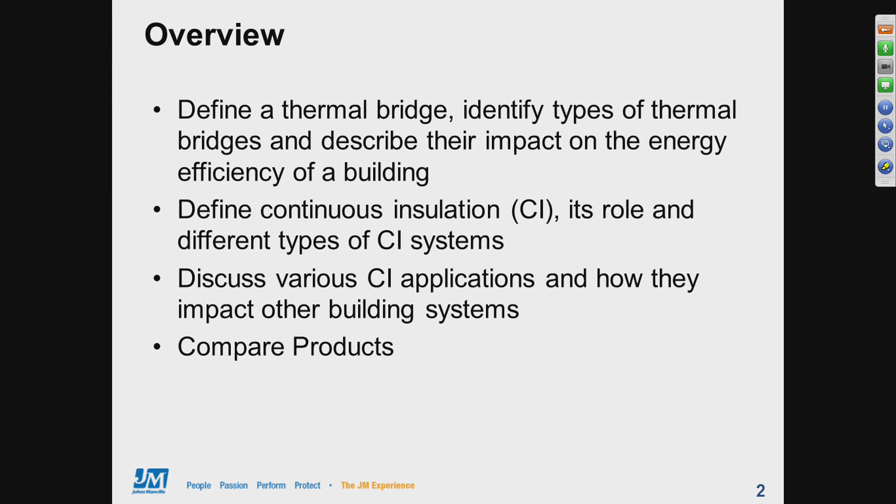Continuous insulation as a concept has been in use since the early 1900s, when ice houses were insulated on the interior with cork sheets. More recently, CI has seen widespread use on low-slope roofs since the 1940s. But today, our focus is going to be continuous insulation on exterior walls.

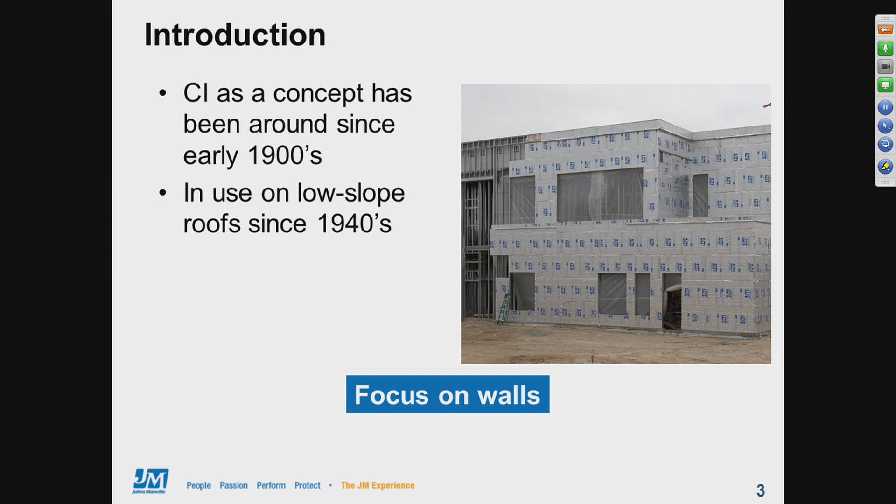Johns Manville currently offers two types of continuous insulation: foam plastic sheathing and exterior spray polyurethane foam. Polyiso is a closed cell foam which brings with it a very good R-value of about R6 per inch. Polyiso boards, in addition to being used as CI, can also create an air barrier and a water resistive barrier if the seams in the boards are taped and penetrations are sealed. Polyiso can be used above or below grade.

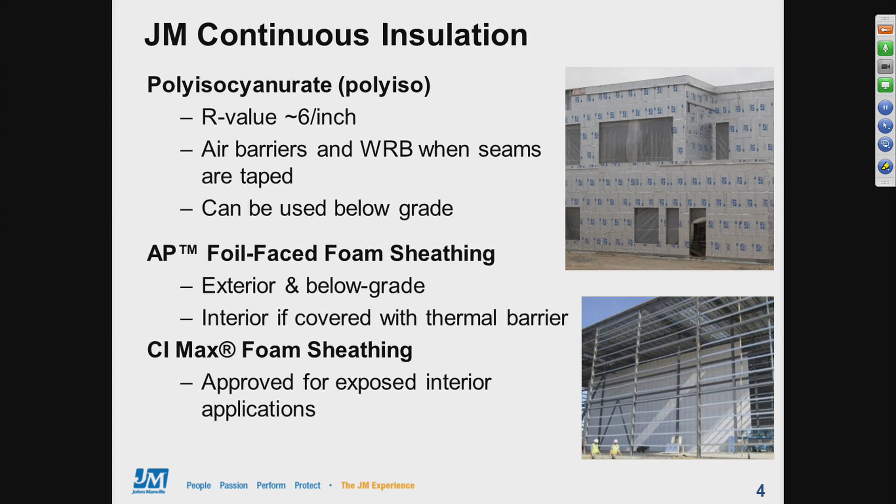JM offers two different brands of foam sheathing: our AP foil-faced foam sheathing and our CI Max foam sheathing. Both products use a Polyiso foam core. AP foil is most often used on the exterior of buildings, like in the upper photo on the slide. On the interior of a building, AP foil has to be covered with an approved thermal barrier to meet fire code requirements. Our CI Max product, however, has been engineered, tested, and specifically approved so it can be left exposed on the interior of buildings without a thermal barrier. CI Max comes with either a plain white or plain silver side without any printing to provide a nice, clean, visible surface.

The other type of continuous insulation offered by Johns Manville is our Corbond III spray polyurethane foam, which can be installed on the exterior of a building. Corbond III is JM's premier closed cell spray foam and provides an R-value of 7 per inch. Corbond III provides air sealing and is approved by the Air Barrier Association of America to provide both air sealing and a water resistive barrier. Corbond III CI has been tested for fire resistance, and we're going to cover a lot of this in more detail later in the webinar. Finally, our Corbond III product provides excellent yield and has a wide window for install conditions, which is really important when installing on the outside of a building.

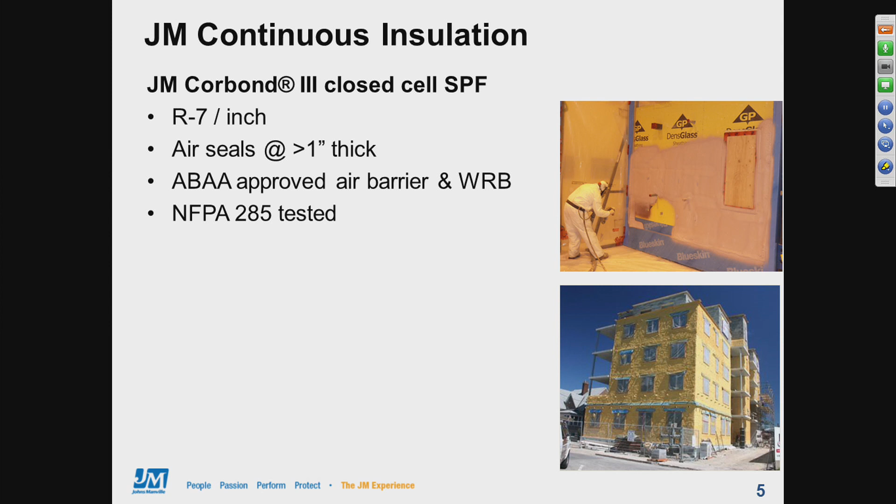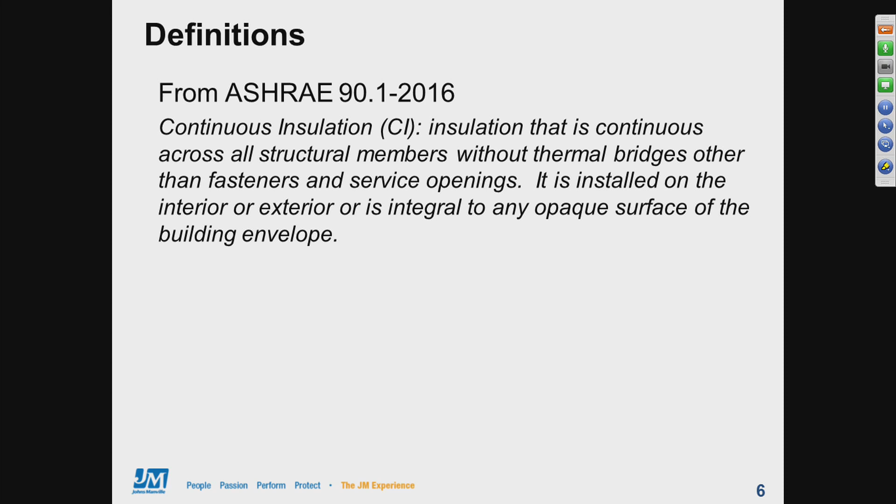To get started talking about the need for continuous insulation, we need a couple of definitions. Both ASHRAE 90.1 and the Energy Code define continuous insulation as insulation that's continuous across all structural members without thermal bridges other than fasteners and service openings. It can be installed on the interior or exterior and could be integral to any opaque surface of the building envelope.

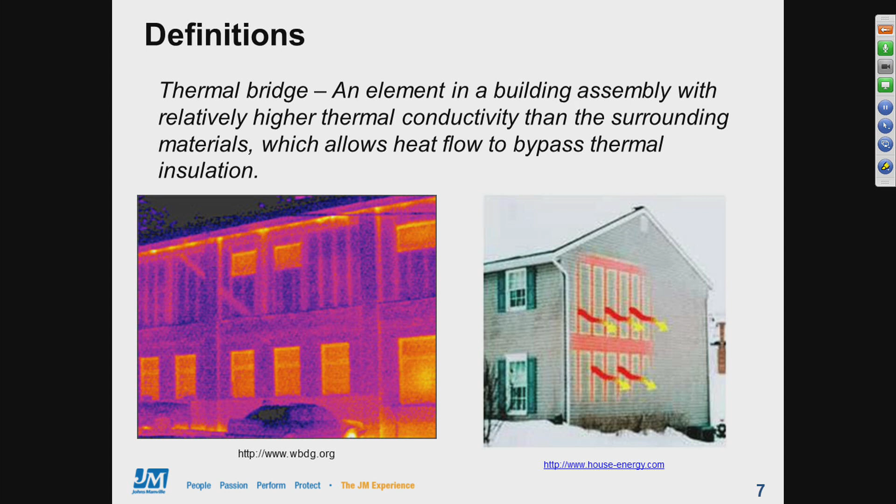So the most common thermal bridges that we have in buildings, just like what we saw in that previous photo, are through the framing. These are really the main elements that are addressed by any code requirements we're going to find for CI. Steel is really the most obvious offender, but wood framing also can hurt wall thermal performance.

In a typical framed wall, the framing can easily account for up to 25%, and honestly even more, of the total wall area.

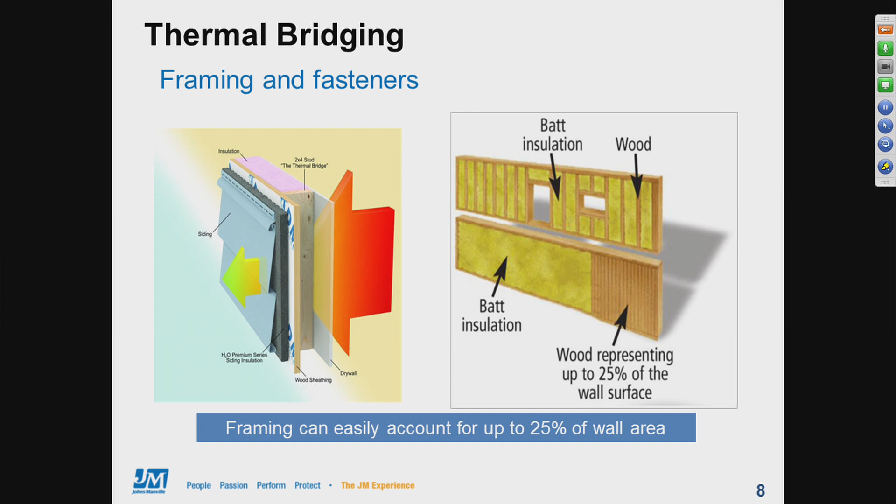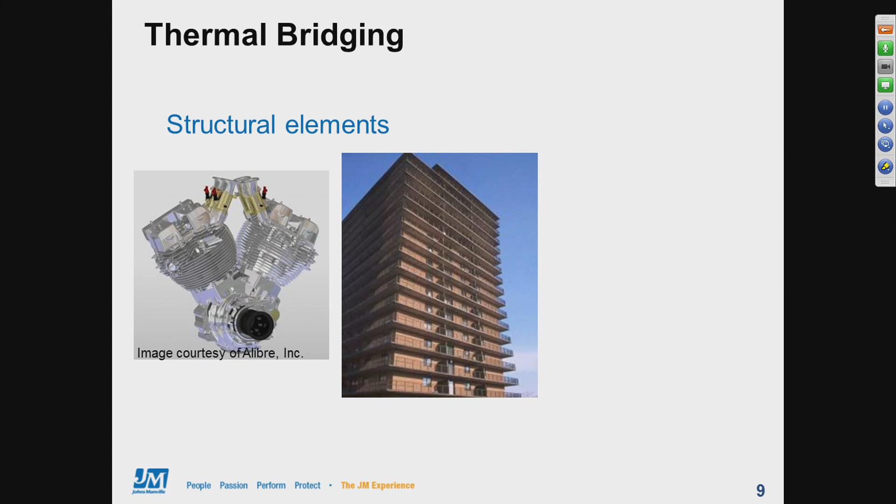If we were to look at this building, though, we might think, if we didn't know how buildings were built, that with all of these cooling fins, this building must produce a tremendous amount of extra heat that we need to get rid of. And certainly if we look at an infrared image of a similar building, we see that this is exactly what these extended balcony edges do. These extended floor slabs work great to take any interior heat and reject it to the outdoors.

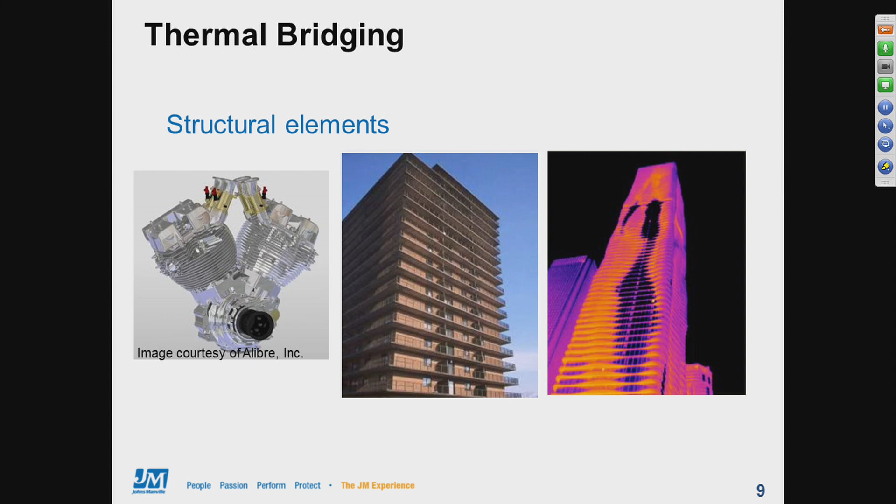So structural elements like balconies and slab edges are really common thermal bridges, and they can be very effective at taking heat out of the building and rejecting it to the surrounding air. The result is that we end up with high heating costs and also very cold floors.

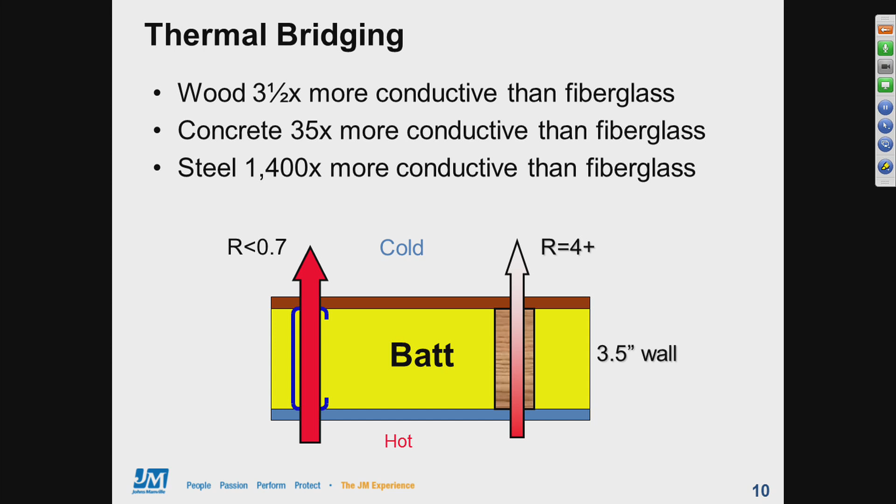To reinforce this a bit more: wood, concrete, and steel can all form thermal bridges because they all conduct heat much better than insulation. For comparison, wood is about 3.5 times more conductive than fiberglass insulation. Concrete is about 35 times more conductive than fiberglass, and steel is 1,400 times more conductive than fiberglass.

So now let's look at a couple of examples that show the impact of thermal bridging from both wood and steel framing. And I promise this is the only slide in the webinar today that has anything even resembling math in it. So we're not going to go into any technical rabbit holes.

What the method lets us do is treat the framing areas of a wall and the cavity areas of a wall separately, and then later take an area-weighted average of the two to determine what the overall performance is.

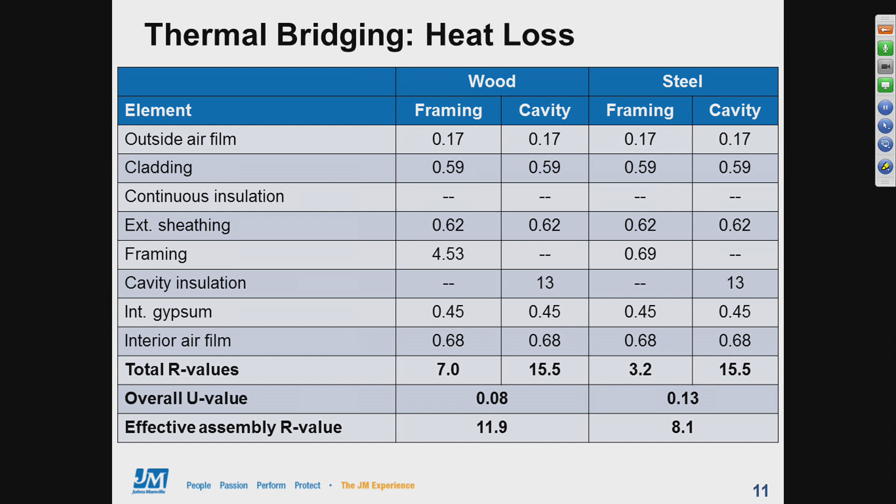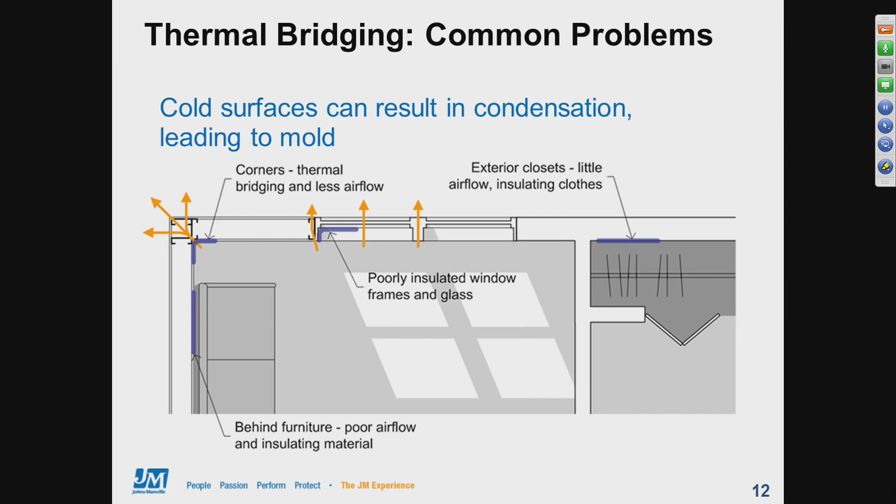Thermal bridging doesn't just impact energy use. It can also severely impact comfort and even indoor air quality in a building. It can lead to cold spots on walls, floors, corners, window frames, behind furniture, and even in closets. These spaces get little air circulation, and furniture or clothing inside closets acts as additional insulation. Condensation in these spots can easily form, and that can even lead to mold growth inside our buildings - none of that is good.

The solution to all of these thermal bridging problems is continuous insulation, and there are many types of materials available. Foam plastic sheathing is mainly made from either polystyrene or polyisocyanurate foams. Closed-cell spray foam can also be used as continuous insulation, and other materials, such as mineral wool boards, can also be used as continuous insulation.

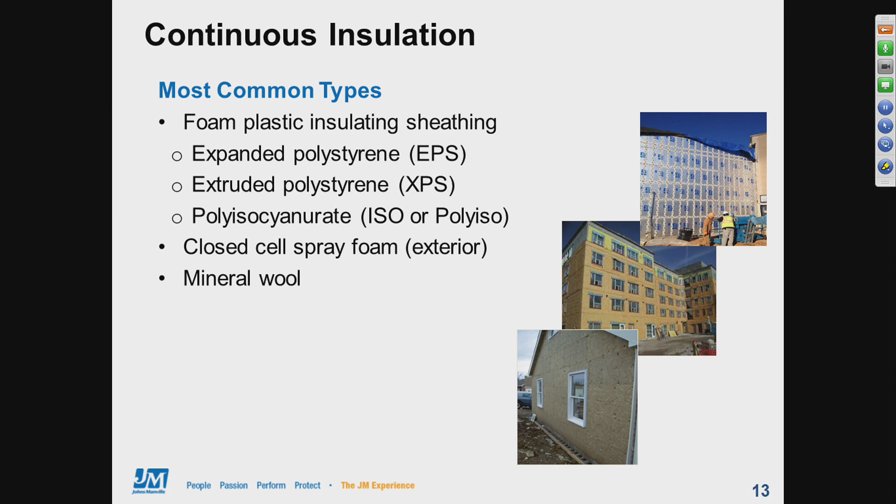Exterior spray foam doesn't need any tape, but it may still need flashings around windows and doors. Mineral wool boards will drain water, but they still need a separate drainage layer to ultimately keep water out of the wall. All of the materials listed can be used below grade.

Water vapor permeability is one of the areas where materials can vary widely. Polystyrenes tend to be more water vapor open than spray foam or polyiso foam, but in general, thicker foams of any type will end up having a lower water vapor permeability. Finally, mineral wool boards are extremely water vapor open, at around 110 perms, and these differences between materials can ultimately drive other decisions in how a wall system might be designed.

Next, the ability to act as part of an approved air barrier system is also critically important. Different products carry different levels of testing and approval. It's really important to look for products and systems with Air Barrier Association of America approvals, as these products will have passed through a rigorous set of tests that include install details for a successful project.

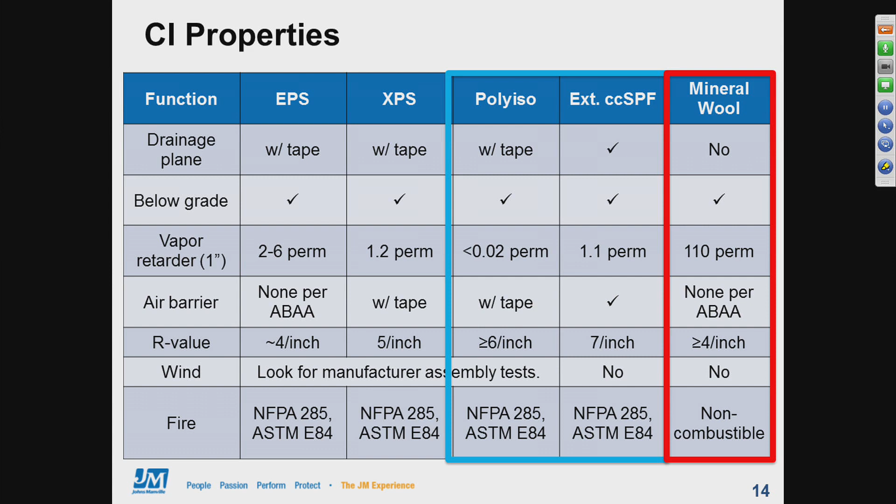They can all provide drainage, air barrier, and vapor control functions. Later in 2017, JM will be launching a mineral wool CI board as well, which will add this vapor open and fire resistant material to our continuous insulation portfolio.

The first is R value. Polyiso has one of the highest available R values of CI materials. Johns Manville's Polyiso products provide R values of about 6 per inch of thickness. Higher R value is important because it allows project needs to be met with thinner CI material.

Using a lower R-value CI results in an overall thicker wall system, which can impact fasteners, cladding attachments, fastenings, windows and doors, and angle supports.

Fire resistance is another key distinction. In a fire situation, polyiso foam forms a char layer but remains solid, whereas polystyrenes can soften and melt and even potentially drip burning liquids. Finally, polyiso is not affected when exposed to solvents, adhesives, or coatings, whereas many polystyrene materials can be aggressively attacked and even dissolved by petroleum-based materials. So all important things to consider when choosing different materials to use.

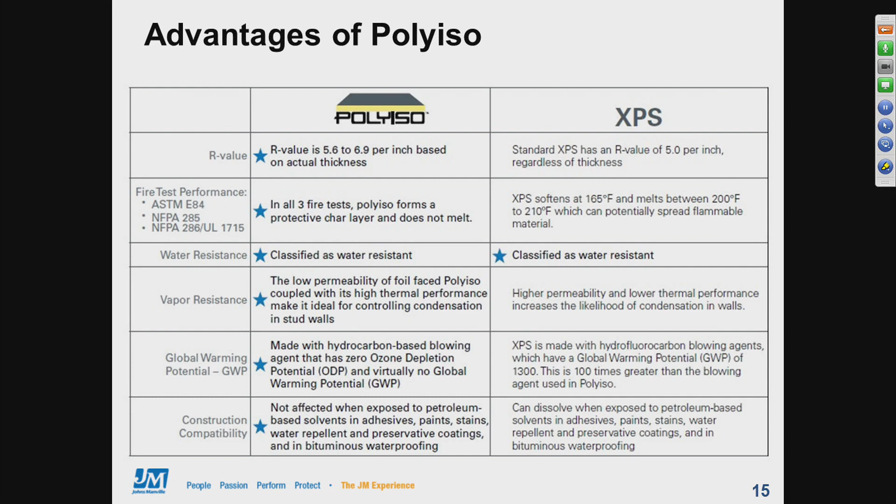Before we move on, we're going to review quickly some of the benefits of using continuous insulation. Using CI in a project helps well beyond just meeting the needs of the energy code. By preventing thermal bridging, CI reduces energy loss, which in turn reduces heating and cooling costs. Preventing thermal bridging also reduces condensation risks in walls and therefore increases wall durability. And as we've mentioned, many CI materials can also act as air barriers and drainage layers.

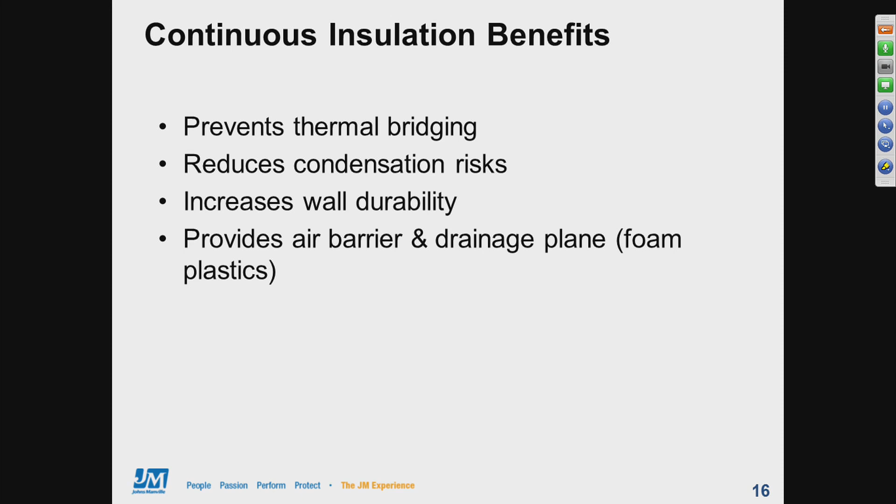Next, we're going to look more closely at applications, how we're going to use CI materials. As we're focusing on today, really on walls, continuous insulation can be installed on a wide variety of wall types. On the exterior of walls, CI can be used over wood framing, steel framing, pre-engineered metal buildings, and masonry walls.

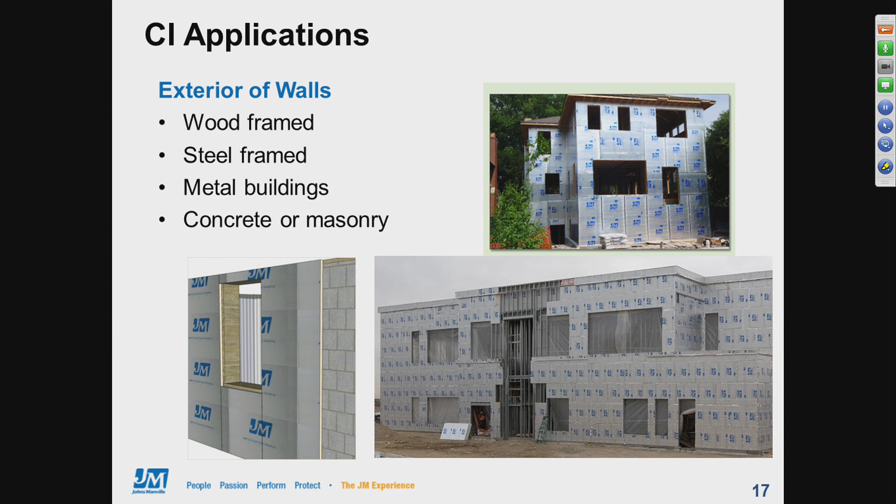Of course, on the exterior is typically where we usually think of using CI, but it can also be used on the interior. Metal buildings are a good example of where we can use CI on the interior, where it could be left exposed to the occupied space, but of course it still then needs to meet fire code requirements.

The example on the left would be Johns Manville CI Max product. In an application like this, where we have a warehouse with a cold storage room inside, CI on the interior is a great solution, and CI Max in particular is a good solution because it can be left exposed.

In this case, in the photo, a matching tape is all that we really need to create a well-sealed and insulated assembly. And of course, we can see in the photo they've put a white tape on the face of this plain white board, so you get a pretty good clean look overall.

For masonry buildings, CI can also be installed on the interior. Interior continuous insulation is often needed, especially for retrofit work on historical buildings where we have to preserve their outward appearance. Of course, in these situations, careful consideration has to be given by the designer to make sure that all of the effects on things like old brick are taken into account.

The photo on the right shows JM's AP foil faced foam sheathing on the interior of a concrete block building, in this case a house in Florida. This approach allows things like stucco or other claddings to be directly applied to the block on the exterior, and the furring strips on the interior are for the gypsum board. So AP foil, remember, must be covered with a thermal barrier, such as gypsum board, to meet fire code requirements.

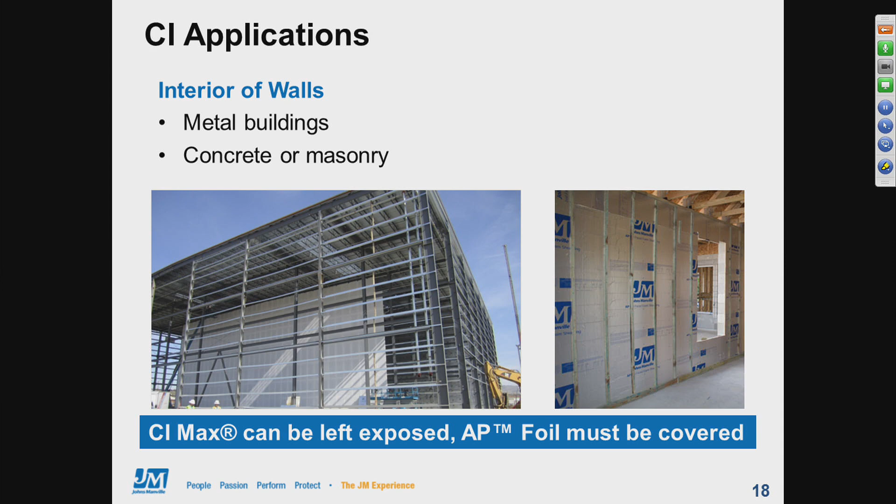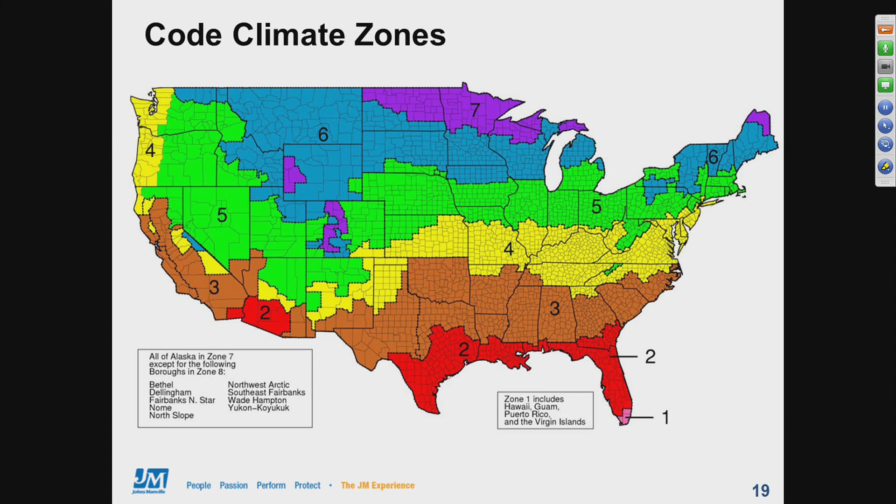When it comes to energy conservation code compliance, how much continuous insulation is required depends on where we're building. The map here illustrates the different climate zones used by the IECC code and ASHRAE Standard 90.1. Basically, the higher the climate zone number, the colder the climate, the more insulation we're going to need.

Over time, the Energy Conservation Code has added more and more requirements for continuous insulation. What this table shows on the slide is kind of a march through time of different code versions.

If we just consider steel-framed walls, and if we start back at the 2006 version of the Energy Code, continuous insulation was really only required in what we would call cold climates, zones 5 and above. This would be like cities like Denver, Chicago, Boston, Minneapolis.

In 2009, the code increased the CI R-value requirements in the cold climates and then extended where CI was needed all the way into climate zone 2, which is what we would consider a warm climate. Climate zone 2 would be cities like Houston or Phoenix.

In 2012, the code further increased the CI requirements even into climate zone 1, which would include Miami, Hawaii, or Puerto Rico. These requirements were maintained in the 2015 and even the 2018 versions of the Energy Code. Essentially, any steel frame commercial construction needs to include continuous insulation unless the designer uses a performance or trade-off method to show code compliance.

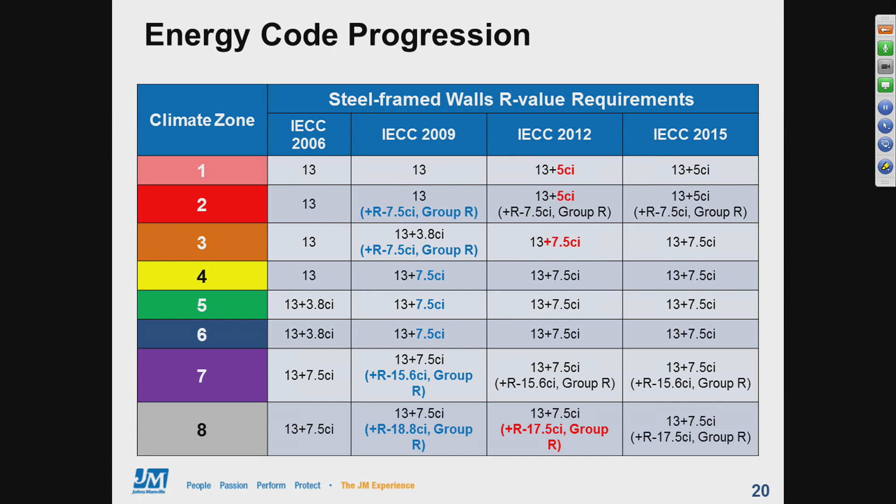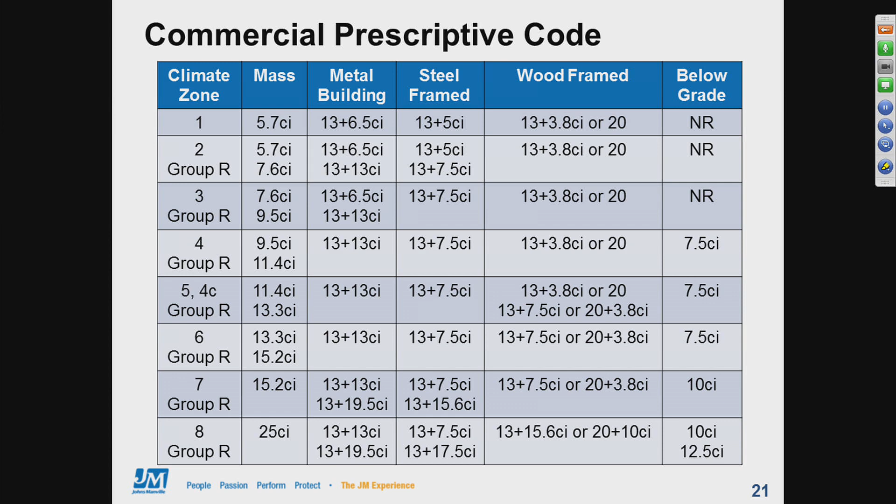If we just look at the 2015 IECC code, like we have a summary of on the slide right now, the common theme to notice is how across all kinds of different climate zones and across all wall types, continuous insulation is called for in the prescriptive tables. So clearly, the code recognizes that CI is a critical component for all code-compliant building envelopes.

So we've talked about how CI can control condensation by reducing thermal bridging in cold spots. The building code also recognizes that if we add CI, we reduce the condensation risks inside the wall, so the code will allow a Class 3 vapor retarder, typically just latex paint, to be used in many cold climates instead of requiring a Class 1 or 2 vapor retarder, which would typically be polyethylene sheets or kraft-faced cavity insulation. But to qualify, there's a minimum amount of CI required, and that depends on the climate and the thickness of the wall.

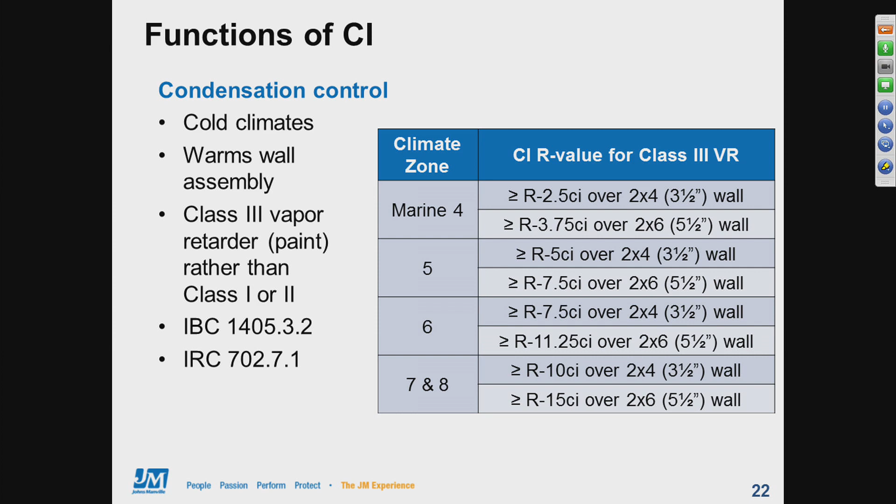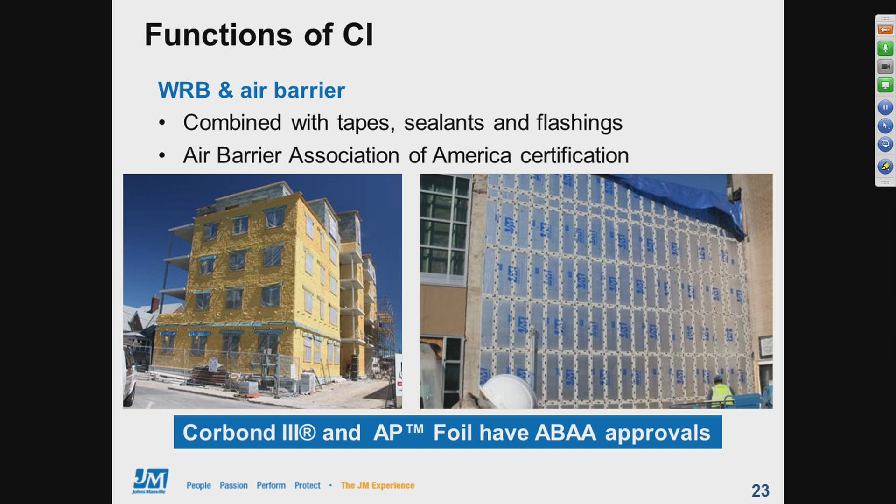Wind resistance testing can also demonstrate how foam sheathings can be used without an additional exterior sheathing. By additional exterior sheathing, here we mean things like exterior gypsum board or OSB. So as with air barrier performance, always look for system level testing from your manufacturer.

The photo here shows an example of only 1 inch thick AP foil-faced foam sheathing mounted to a 20 gauge steel framed wall. This was our air leakage test system, and it was tested for air leakage across a range of increasing air pressures. At the very end of the test, we ended up with an air pressure equivalent to a 200-mile-an-hour wind. As you can see in the photo, there's a little kink in those steel studs. The wall itself buckled, at which point we stopped the test for safety reasons. But it's important to note that the foam boards never broke and the tape seams never failed, even at this really high air pressure.

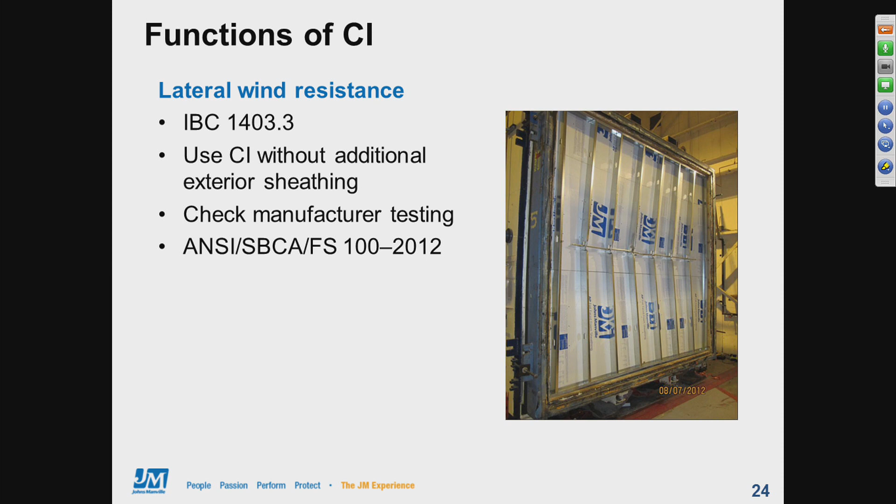For foam plastic, fire code is a key consideration, and for foam plastic continuous insulation, one of the primary fire tests we all have to pass is called NFPA 285. This is a required test for any wall systems with foam plastic on types 1 through 4 construction. Construction types 1 through 4 are considered non-combustible versus type 5, which would be wood frame construction.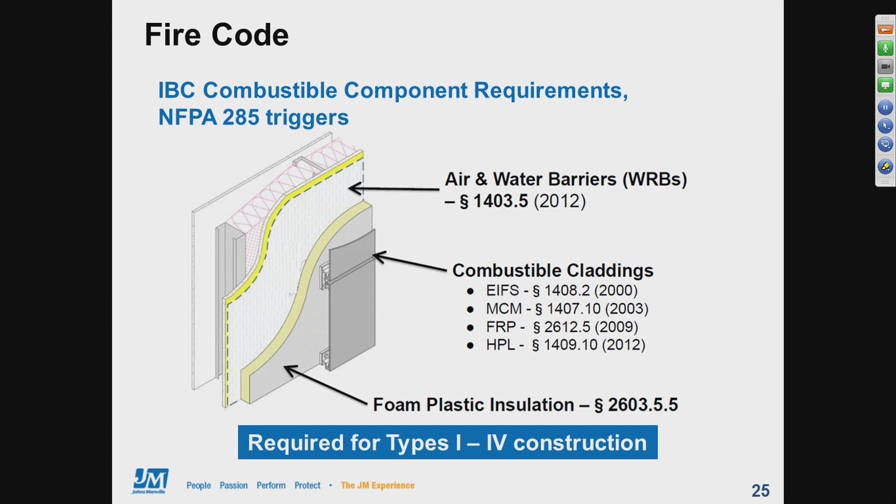The NFPA 285 test is required not only for foam plastics, but also for combustible air barriers, combustible cladding systems, as well as foam plastic insulation. So you should see these sorts of tests published for house wraps, just a wide variety of combustible materials. The NFPA 285 test is a system level test, which means it includes everything from the cavity insulation and the framing all the way out to the exterior cladding of the building. Again, Johns Manville's AP foil foam sheathing and Corbond III products have test reports for all of these tests, and the reports show a large table with all of the approved system combinations.

We've touched on this before, but it bears repeating that sheathing materials perform differently when exposed to fire. Thermoset plastics, such as Polyiso and closed-cell spray polyurethane foams, char and tend to stay intact during fire exposure. Thermoplastic foams, such as polystyrenes, can soften and melt and can even drip burning liquids in a fire situation. Finally, mineral fiber is non-combustible, and so it really provides the best fire performance of all CI materials.

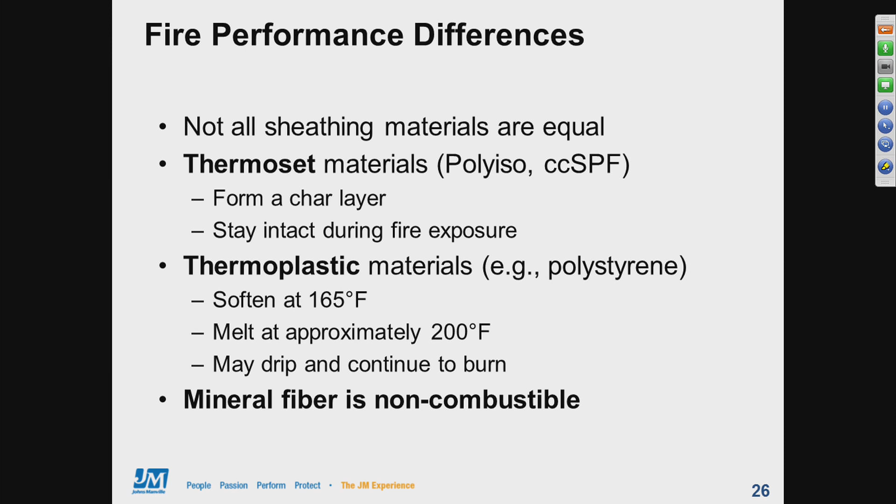When it comes to installing continuous insulation, the devil is truly in the details. Whether CI materials are used as water-resistive barriers, air barriers, or just for their thermal performance, they change the way a wall system is built and require careful detailing. The responsibility for these details lies with the designer, but there are resources available from Johns Manville, the ABAA, and the Foam Sheathing Committee that provide excellent resources to help answer these questions.

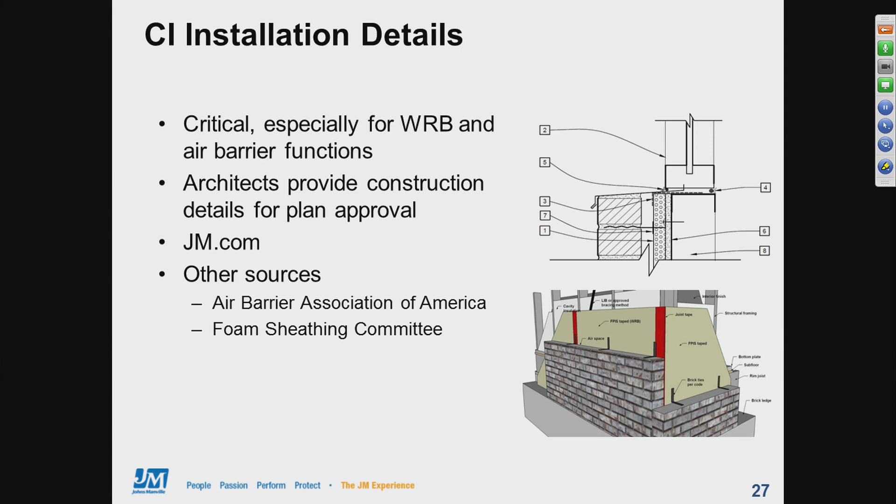To help bring everything together, Johns Manville has developed the JM All-Purpose Wall System. This system has been designed and tested, combining our AP foil face sheathing with various options for cavity insulation, fasteners, tapes, and cladding systems. Because of our high-pressure air leakage testing, the system can even be used without additional exterior sheathing, which could be an option to reduce cost and wall thickness.

While we recommend using tapes and sealants to deliver drainage and air barrier performance, tapes can also be omitted, and the system could be combined with more traditional methods such as building wraps or coatings. The All-Purpose Wall System includes many installation details and helps deliver a successful project.

Now that we're getting to the end, let's summarize and compare the various Johns Manville insulation products we've learned about. JM currently has 3 CI products available: our AP foil face foam sheathing, our CI Max foam sheathing, and our Corbond III spray foam.

Corbond III provides the highest thermal performance of R7 per inch, and also provides air barrier and WRB functions with at least 1 inch of thickness, and vapor control with at least 1.5 inches of thickness. As exterior CI, Corbond III can be installed up to 3.5 inches thick per our NFPA 285 fire approvals. JM's foam sheathings are available in a wide range of thicknesses and R values, from R2.7 up to R28.

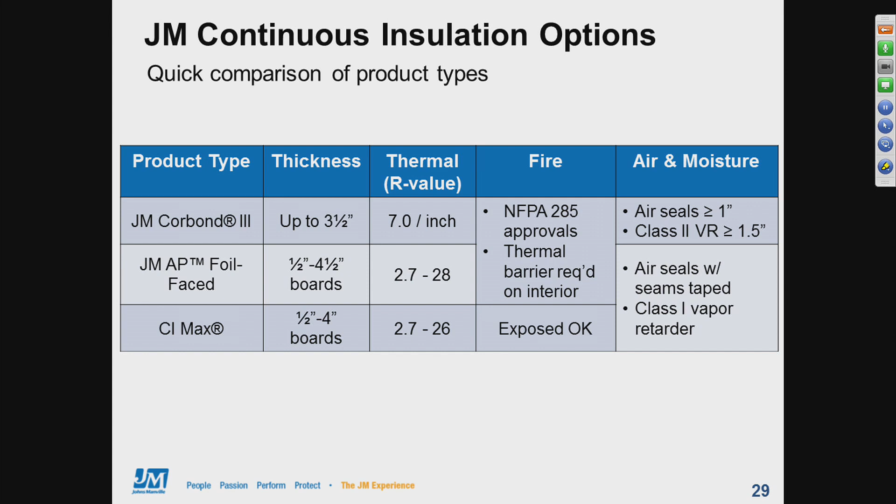Finally, remember, we will be launching a mineral wool CI board in 2017. As a teaser, there'll be webinars covering that in more detail when that product launches.

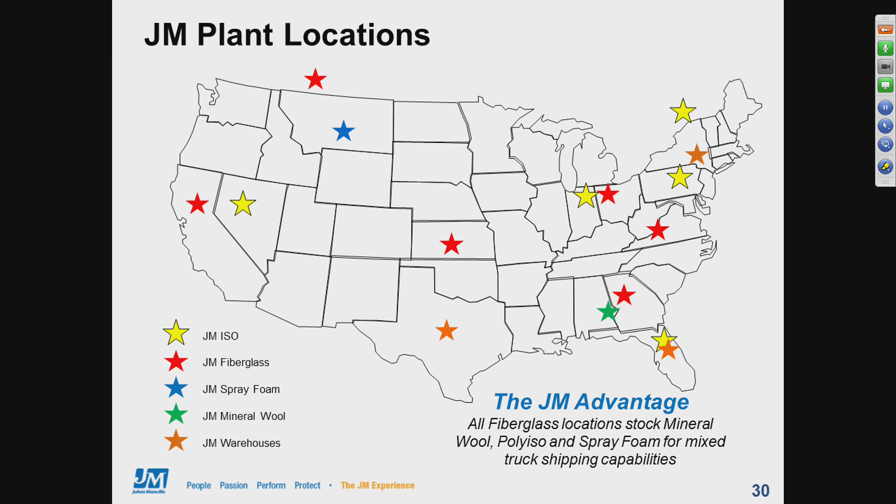In addition to the products we have, JM stocks our AP foil and mineral wool at all of our fiberglass manufacturing facilities, and CI Max is produced in all of our Polyiso plants. It's available with either a white or silver facing without any printing on it, and also in extended sizes to fit your needs. The JM Advantage puts what you want to order on one truck to maximize your inventory, service your customers across a number of product lines, and stock jobs more efficiently.

To finish, today we've learned about different types of thermal bridges and what kind of impact they can have, from both an energy perspective and things like comfort and indoor air quality. We explored the different types of continuous insulation and their properties. We talked about energy code compliance with continuous insulation. And we looked at the benefits of CI, not only thermal benefits, but other functions CI can deliver, such as managing air, water vapor, and condensation risk. We examined fire code considerations for CI and the importance of good installation.

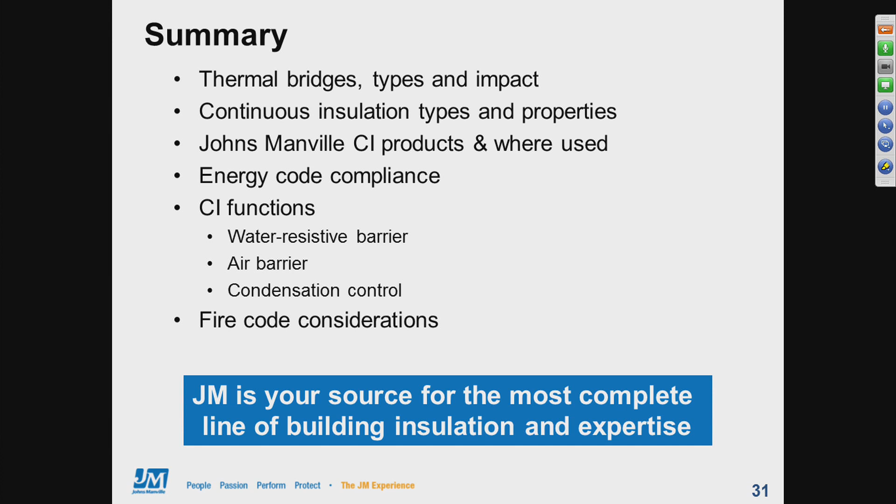In closing, we'd really like you to remember that Johns Manville is your source for the most complete line of building insulation products and expertise. And with that, our webinar is over.

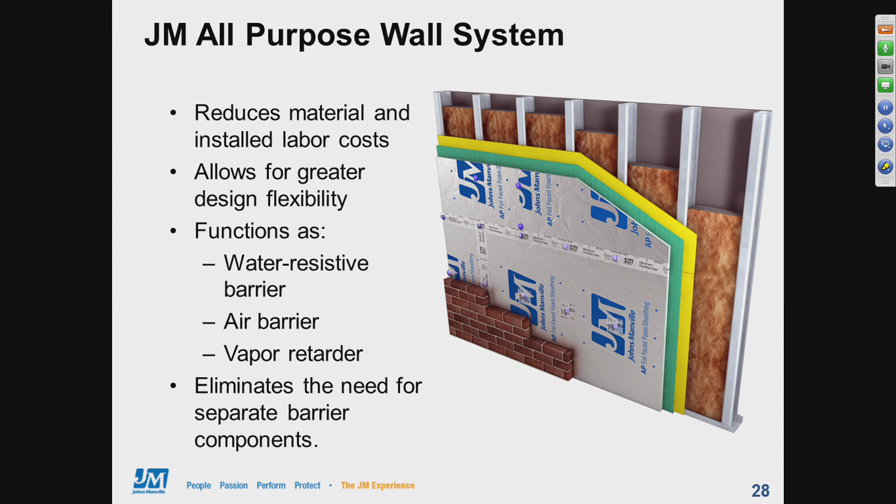Does JM sell tapes and fasteners? So JM doesn't—let me back up. We do sell a fastener for our AP foil system to go with the all-purpose wall system. We do not directly sell tapes. For the all-purpose wall system, we have a specified tape that your territory manager can help put you in contact with a distributor for. And for CI Max, we have identified recommended tapes that will match the surface finish of both the white and silver CI Max boards. Again, your territory manager can direct you to those.

Lastly, can JM foam sheathings be used below grade? Yes, they can. JM's AP foil Polyiso can be used below grade. This is something we're working on getting the message out there, because there's some historical wisdom suggesting Polyiso can't really be used below grade, but in particular, the foil-faced materials we use for sheathing can be used below grade just fine.